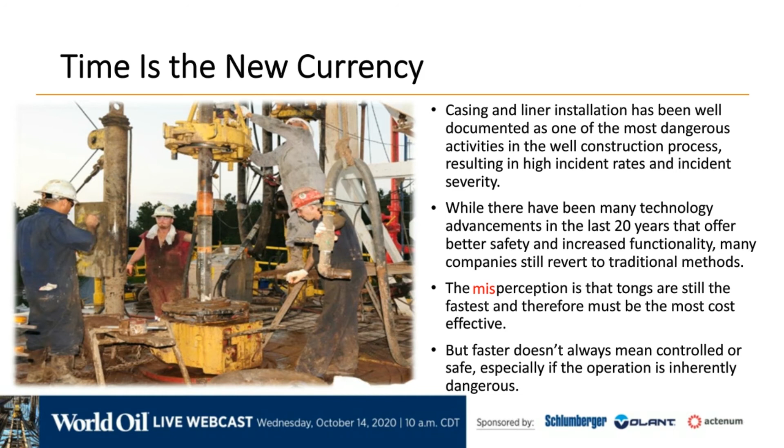At Volant, our broad focus on tubular running efficiency, which includes the continuing advancement of casing running tool technology, led to the development of our True Analysis software. Our True Analysis app exposes the truth behind tubular running efficiency using readily available rig data to generate accurate and unbiased reports on the distribution of time spent during the casing and liner installation process.

The focus today is on in-slip operations. However, we do acknowledge that opportunity may also exist to optimize out-of-slip time, but we'll talk about that another day. Having visibility on in-slip operations creates significant opportunity to optimize equipment selection and operational procedures that can enhance safety and reduce the time spent performing those operations. Less time spent running casing means less time spent constructing the well, which ultimately means reduced well construction costs.

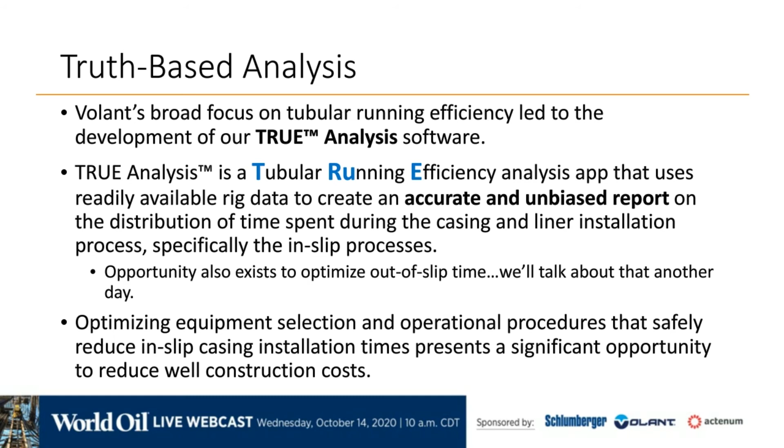The report itself is generated post-run and offers the option to analyze performance of runs that use either tongs or CRTs as the primary connection makeup device. It's very comprehensive in the way it analyzes the data, but presents in an easy-to-read format and enables quick dissemination and interpretation of the information reported on. High-level casing string detail is reported on the report header.

The rest of the report can then be used to identify operational inefficiencies and expose where invisible lost time is being spent, providing a guide for future run goals and operational action plans aimed at eliminating rig time usage uncertainty. It's also been used successfully to debunk the myth that tongs are always the fastest way to install casing and liner.

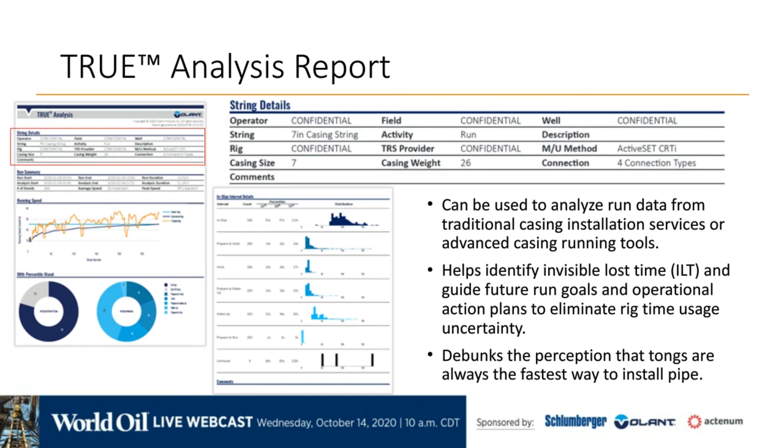The middle section of the first page reports on overall running speed. In the run summary section, we document the number of stands run in hole. Note that we're not calling it joints per hour, and that's intentional. The program is tracking how many connections are being made up, not counting the number of joints. So if you're running single joints, then it would technically be the same as joints per hour.

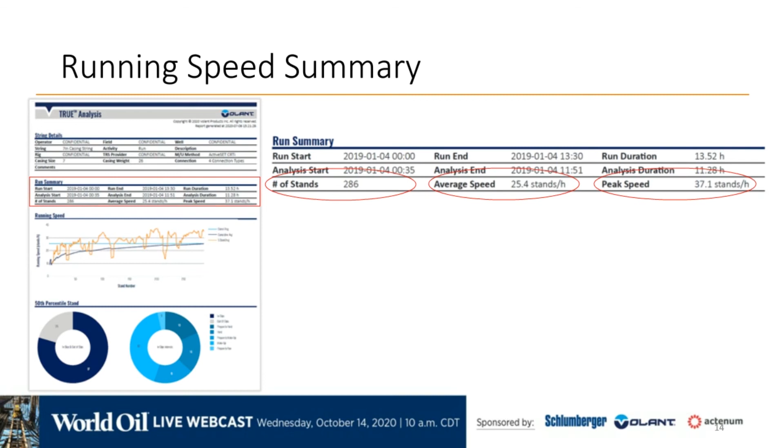But if you're running doubles or triples, you would multiply the stands per hour rate accordingly to determine the number of joints per hour. We are also reporting the average and peak running speeds achieved for the run. The peak speed represents the quickest set of 5 consecutive stands over the course of that run.

Total run performance is also shown in the form of line graphs. In this run, it was the first time the rig crew used the casing running tool technology, and you can see that even though things started off relatively slow, the speed ramped up quickly and sustained quite nicely once the driller became familiar with how the tool functioned.

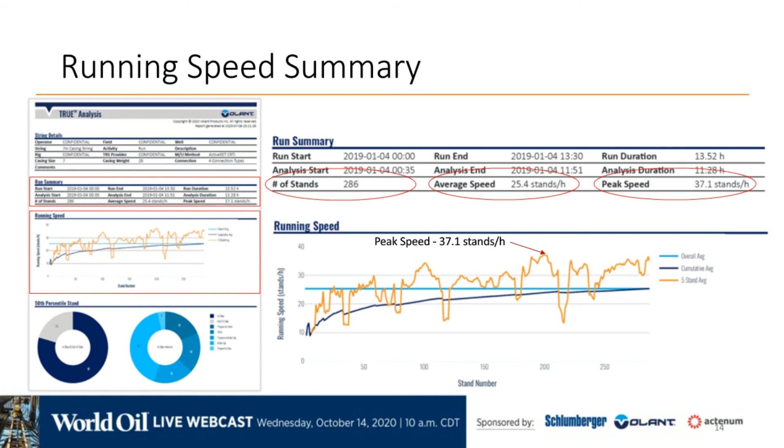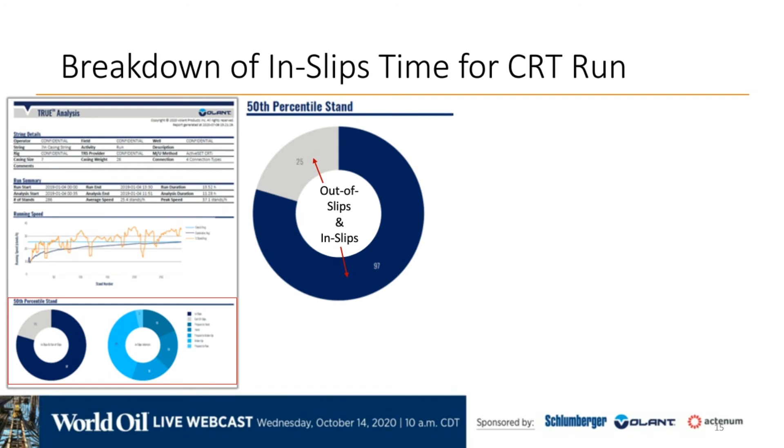The bottom section of the first page presents the breakdown of in-slip and out-of-slip time. And this is where we feel our program differentiates significantly from other casing running performance monitoring software. While measuring running speed is not a novel concept, we believe that reporting and breaking down the distribution of in-slip time is. And this is where True Analysis provides its greatest value.

In this particular run, which utilized a casing running tool, the distribution of in-slip time is broken down into 5 segments: prepare to hoist, hoist, prepare to make up, make up, and prepare to run.

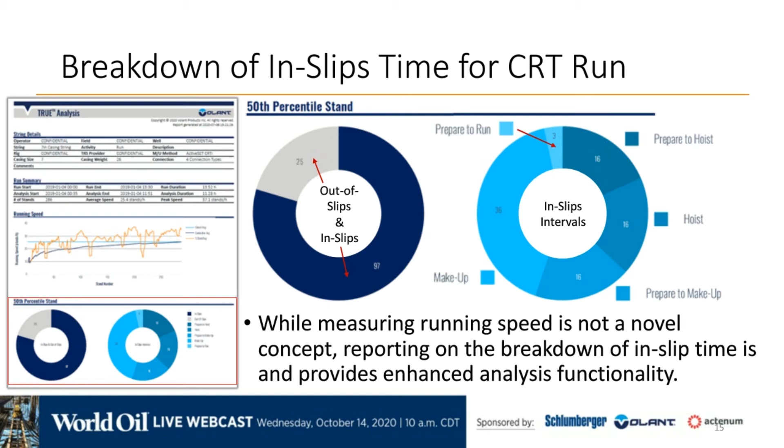Page 2 of the report shows how the distribution of time is reported for total in-slip performance as well as for each key segment within, reported in the 25th, 50th, and 75th percentiles. It's a very detailed report on this side. Focusing here on total in-slip time, we can see how the distribution ranged both by value as well as visually in the graph. Being able to see the shape and distribution of the data then allows you to focus on those segments that could benefit from more attention.

Efficiency is often a result of consistency. So what you're looking for is how tight is the distribution of data. The tighter the distribution, the more consistent the operation. Once you have consistency, it then becomes easier to focus on speed and efficiency.

As you can see here in the prepare to make up section of the CRT run, a very tight distribution of data coupled with a relatively short duration of time to perform this segment indicates the crew was not only consistent in their prepare to make up operations, but also quite efficient. For context, the prepare to make up segment of a run using a CRT includes the stabbing and tool engagement steps.

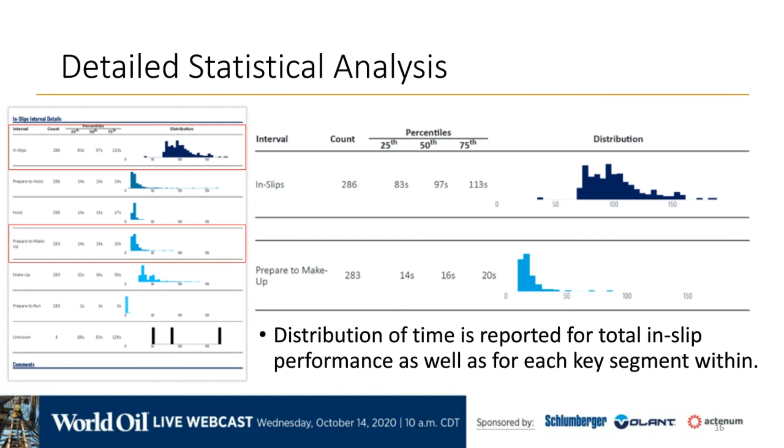Being able to analyze the breakdown of in-slip time allows you to uncover inconsistencies during the run as well as between different crews. Inconsistencies are represented by a wide distribution and scattering of the data points. Highlighting those inconsistent processes then allows the users of the program to introduce the best practices and equipment that can improve consistency.

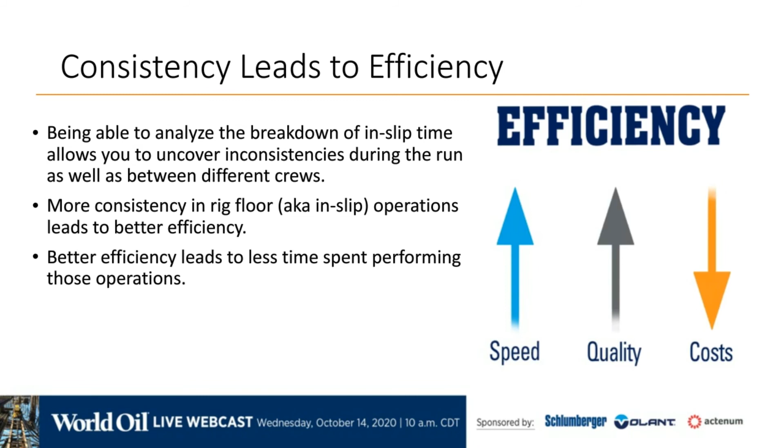Being able to create more consistent in-slip operations makes it easier to focus on improving those operations, which in turn leads to better efficiency. Better efficiency then leads to less time spent performing those operations. And of course, less time spent performing the operations results in quicker well completions and reduced overall well costs.

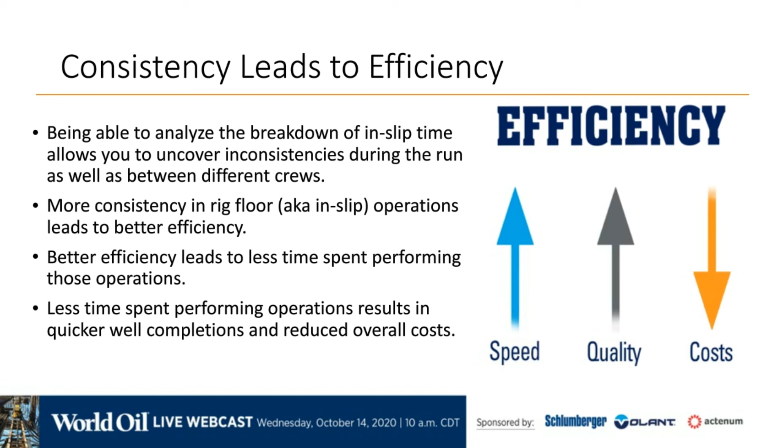So here's a case study utilizing data from 2 multi-well pads using a Volant CRT as the primary makeup device. The data has been anonymized to keep confidential at the request of our customer. However, it accurately represents and is not altered in any way. The operator, rig crew, and crews were the same for each pad.

Each pad was batch drilled and completed, and the post-run analysis occurred after completing all 8 wells on each pad. The same sections are being analyzed for each pad and were drilled and completed in similar style. Looking at the prepare to make up segment once more, we can see here in pad 1 a large scattering of data between each well, which indicates large inconsistencies in performance from one well to the next.

But why is that? Digging deeper into the data, reviewing run notes, and discussing with the crews, the post-run analysis yielded 2 findings. First, one crew was more proficient in setting the CRT than the other crew. Second, unnecessarily long spacing between the CRT and the casing coupling resulted in CRT tool stabbing challenges and extra time spent trying to stab the tool into the casing.

This is a prime example of exposing invisible lost time. Stabbing the CRT is a required step when running pipe, so many would not think to look at that specific part of the operation as a place to save time. But how do you know what you're proficient at if you don't know how quick you can actually be? Being able to accurately measure things like this exposes these opportunities.

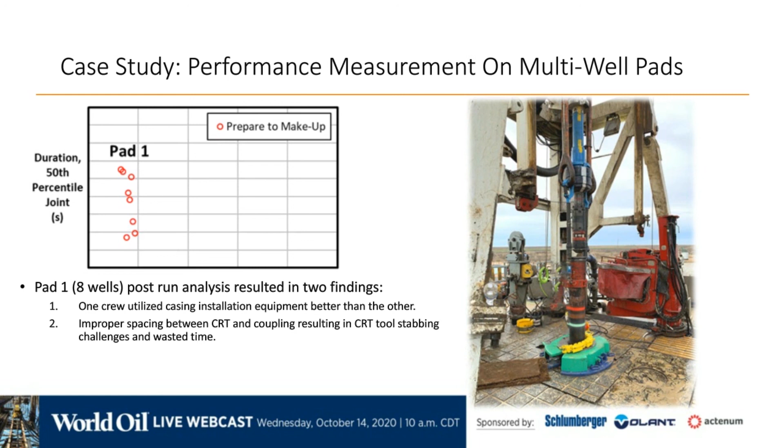So what was the result? Pad 2 showed significant improvement in consistency between both crews for all 8 wells, and that was achieved on the very first runs utilizing new equipment the rig and crews had not used before. The combination of the 2 adjustments resulted in a 25% reduction in time spent during the prepare to make up segment, saving approximately 4 hours of total rig time, not to mention making the lives and jobs of the crews much easier. And this was, again, the result of only one iteration of analysis focusing on a single segment of the casing installation process.

Now, you'll notice in pad 1 that some of the times were actually less than the average or cluster of times in pad 2. The next iteration of analysis would then allow you to focus on how to turn what has now become a very consistent operation showing in pad 2 to a consistent and faster operation on the next pad. So let me ask you, would you rather be responsible for finding ways to improve efficiency in performance on the inconsistent pad 1 or on the consistent pad 2?

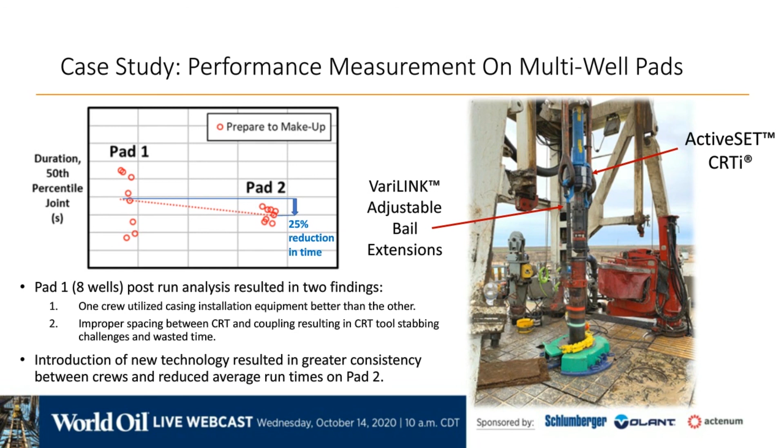And it's true, what gets measured gets managed. In today's climate, seconds matter, and they all add up, especially during operations that are repeated hundreds of times per well, such as when installing long completion strings. So let's take a case. What's it worth to save 25 seconds off your in-slip time per joint on a 400 joint completion? You do the math, and that saves you over 2 hours of time per well, just for that one segment.

What True Analysis does is it enables a quick and accurate analysis of the tubular running process, with the ability to identify in-slip operations that are inconsistent and inefficient. The program helps operators and service providers establish detailed baseline KPIs for current operations and enables the creation of target metrics for ongoing TRS performance management. It's a tool that enables opportunity for continuous improvement.

It can bring focus to invisible lost time spent during in-slip operations and highlights areas where opportunity exists for efficiency improvements, including enhanced and focused crew training, and perhaps most importantly, allow you to confidently introduce new technology and processes that enhance operational safety and provide sustainable cost reduction solutions.

Now, operators and service providers can use True Analysis to quantify the improvements and justify the operational changes made, instilling confidence in the decisions to try something new that may increase efficiency, improve safety, reduce operational and carbon footprints, and at the end of the day, reduce your well construction costs.